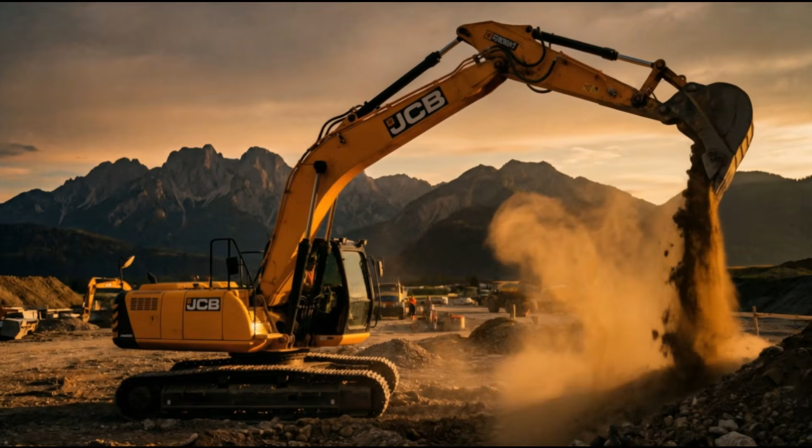You push with the force of one finger, and out comes enough power to flip a car. Sounds impossible? It's not. It's physics. What if I told you there's a simple law discovered over 370 years ago that lets a tiny pump move a 5-ton excavator arm? One law, that's all it takes.

It's called Pascal's law. And once you understand it, you'll see it hiding inside every machine around you, from your car brakes to airplane landing gear. Today, we're going to break it wide open.

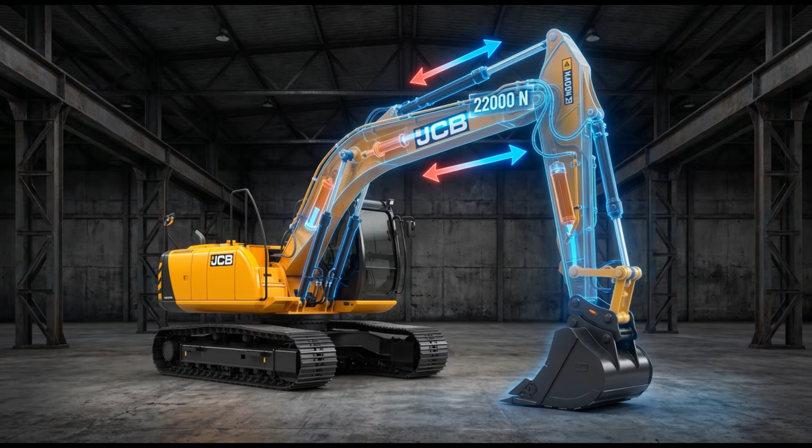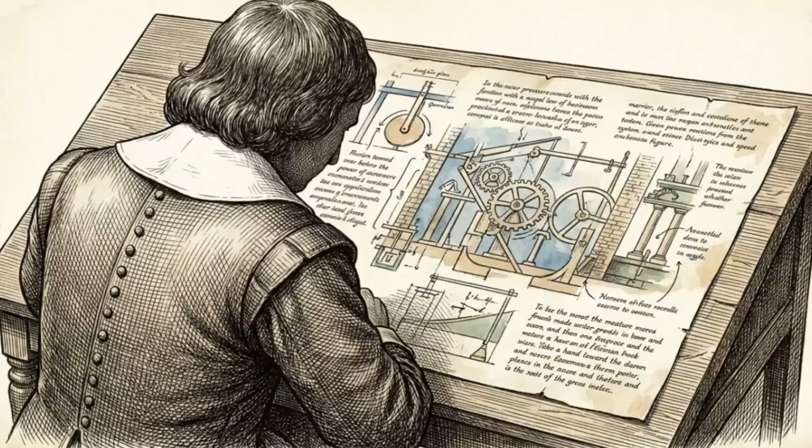Now, before we get into the science, stick around until the end, because I'm going to show you something wild. We'll take a real hydraulic system, a JCB excavator, and calculate exactly how much force its arm produces. Actual numbers, actual areas, actual newtons. You'll be able to do this calculation yourself by the time we're done. But first, let's meet the man who made all of this possible. A French mathematician born in 1623 who changed engineering forever.

Blaise Pascal. This wasn't your average kid. By the age of 12, he was figuring out geometry on his own, drawing shapes on the floor, proving theorems that grown mathematicians struggled with. By 16, he wrote a major paper on conic sections. By 19, he built one of the world's first mechanical calculators, the Pascaline, to help his father with tax calculations. The guy was basically an engineering prodigy.

But the discovery that matters most to us? That came in 1647 and 1648. Pascal started experimenting with fluids and pressure. He filled tubes with mercury. He carried barometers up mountains. And what he found changed our understanding of how liquids behave under pressure, permanently.

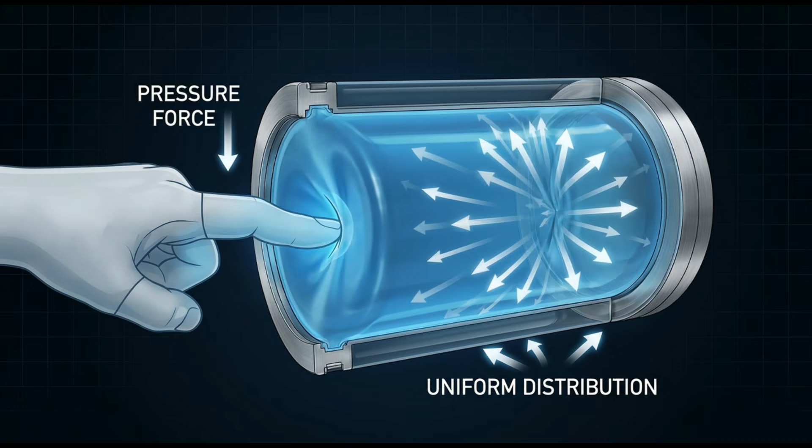So here's what Pascal figured out. And honestly, it's beautifully simple. He said, when you apply pressure to a confined liquid, a liquid trapped in a sealed container, that pressure doesn't just stay where you pushed. It transmits equally in all directions throughout the entire liquid. Every square centimeter of that container feels the exact same pressure.

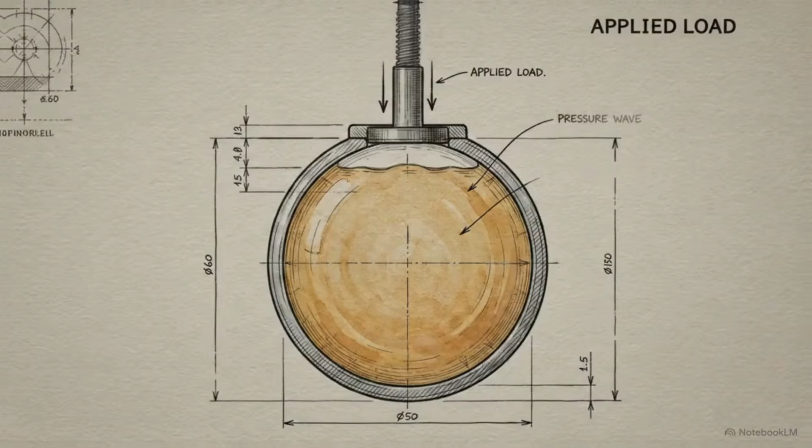Let me say that again, because this is the foundation of everything. You push on one spot, the entire liquid pushes back, everywhere, with the same pressure. Not less, not more, the same. That's Pascal's law. And here's where it gets exciting. Because this one idea is what makes force multiplication possible.

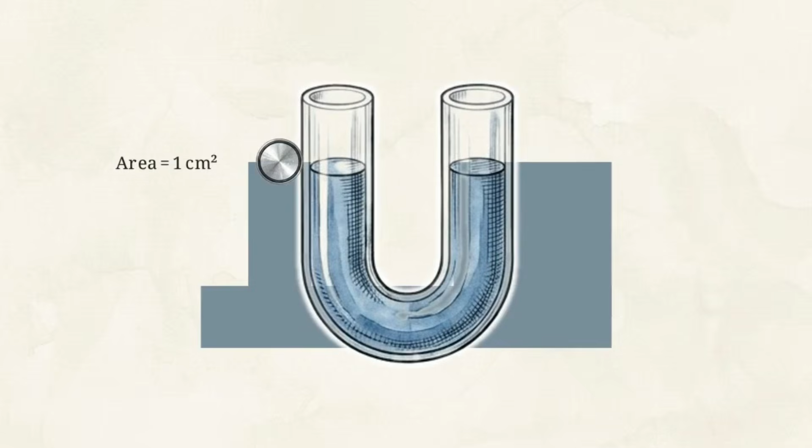Alright, now here's where the magic happens. Imagine you've got a U-shaped tube, sealed, filled with oil. On the left side, there's a small piston. Its area is just 1 square centimeter, tiny. On the right side, a much bigger piston, 100 square centimeters. Now, you press down on the small piston with a force of 10 newtons. That's about the weight of a 1 kilogram bag of sugar sitting on your hand.

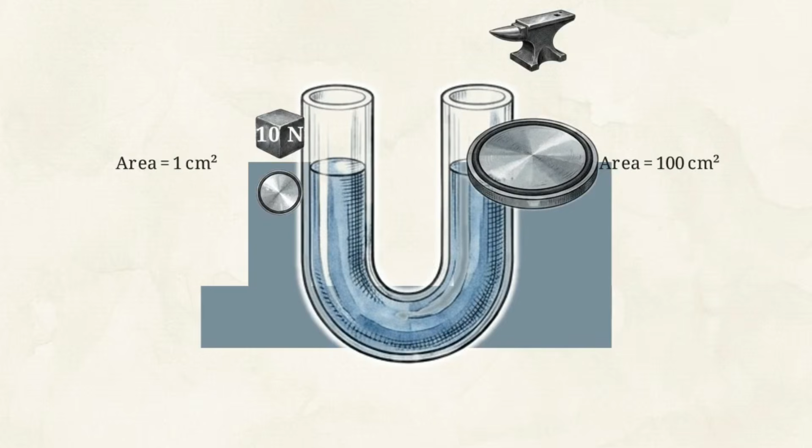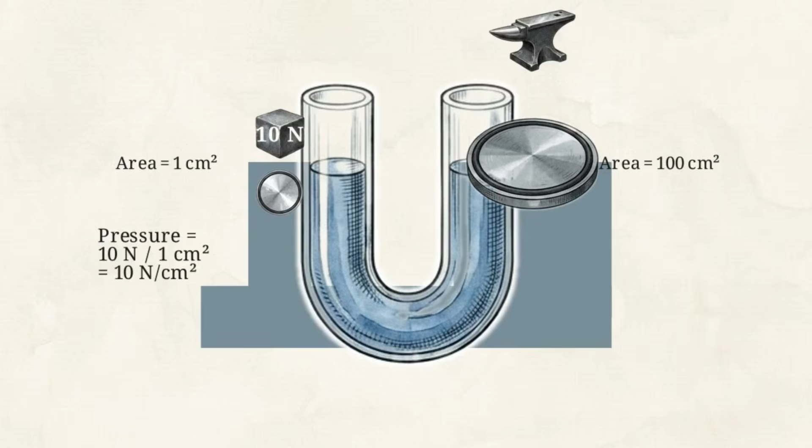Not much, right? But here's what happens. That 10 Newton push creates pressure. Pressure equals force divided by area. So 10 divided by 1 gives us 10 newtons per square centimeter. Now Pascal's law kicks in. That 10 newtons per square centimeter travels through the oil. It reaches the big piston. And because the big piston has 100 square centimeters of area, the force on that side is 10 times 100. That's 1,000 newtons. You pushed 10. You got back 1,000. That's 100 times the force.

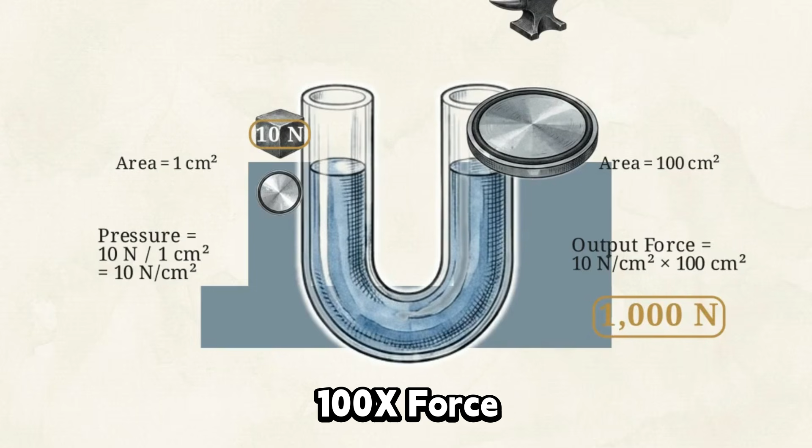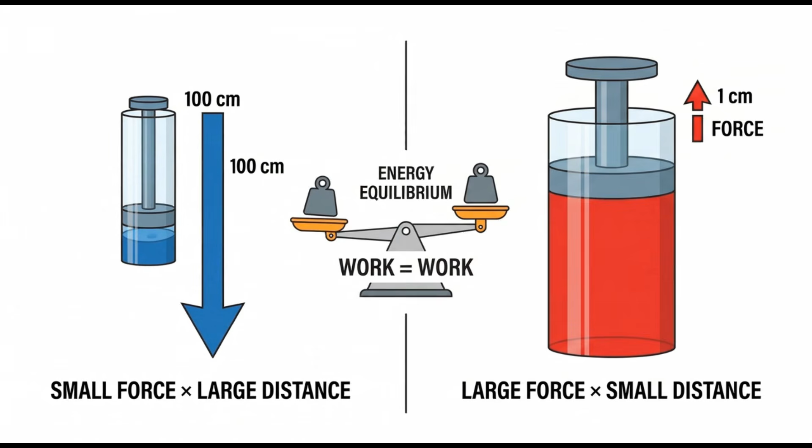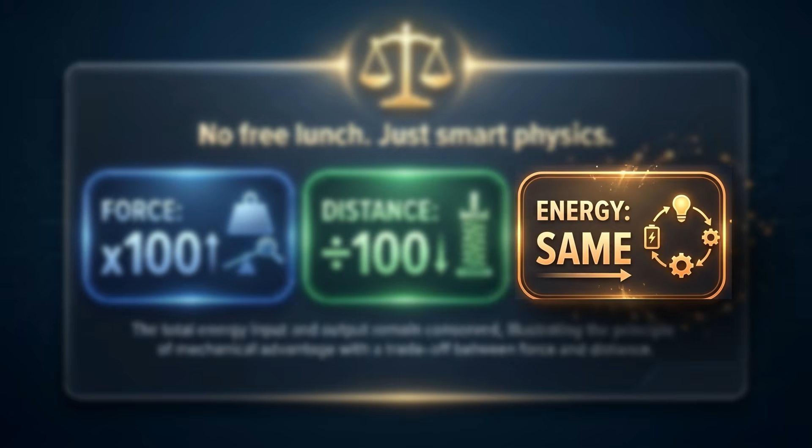From one simple law. Now wait. Before you think you've just discovered free energy, there's a catch. Physics always balances its books. You gained force, but you lost distance. That small piston? It has to move 100 centimeters down just to push the big piston up 1 centimeter. You multiply force by 100, but you divide distance by 100. The energy stays the same. Work in equals work out.

No free lunch. But here's the thing. In most hydraulic machines, you don't need the big piston to move far. You need it to push hard. And that's exactly what this gives you. Let's lock in the math.

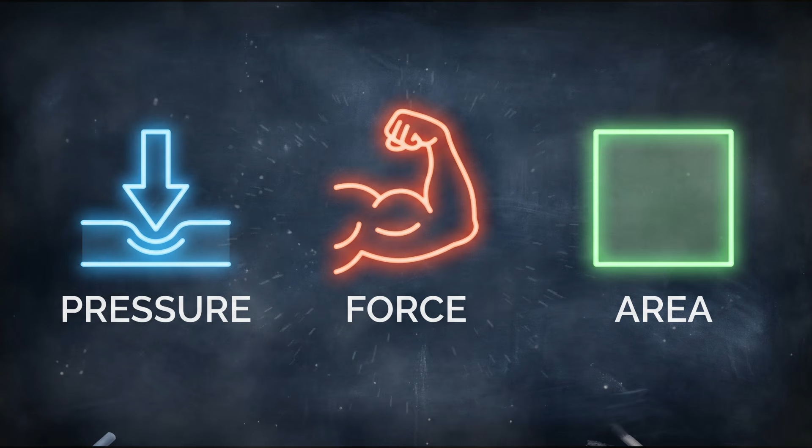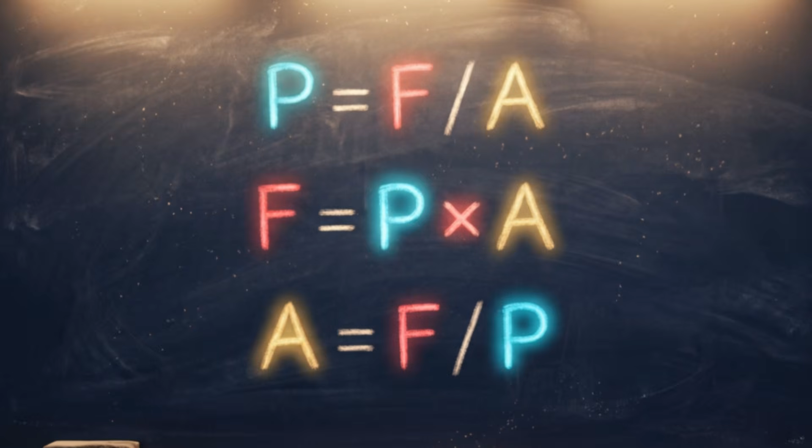Don't worry, it's simple, and you only need 3 things: pressure, force, and area. The core formula is pressure equals force divided by area. P equals F over A. If you know any 2 of these, you can always find the third. Need the force? Multiply pressure times area. F equals P times A. Need the area? Divide force by pressure. A equals F over P. That's it. 3 formulas. They're all the same equation, just rearranged.

Now let me give you a trick to remember this. Picture a triangle. F sits on top. P and A sit on the bottom, side by side. Cover the one you want to find, and whatever's left tells you the formula. Cover F. You see P times A. Cover P. You see F over A. Cover A. You see F over P. Easy. Burn this triangle into your memory.

Let's use this for real. You've got a hydraulic car jack in your garage. The small piston, the one connected to the pump handle you push, has an area of 2 square centimeters. That's about the size of your thumbnail. The big piston, the one that lifts the car, has an area of 200 square centimeters.

Now you pump the handle and push with 50 newtons of force. That's a comfortable one-handed push. Question: what force lifts the car? Let's work it out. Step 1. Find the pressure. P equals F over A. That's 50 divided by 2. Pressure equals 25 newtons per square centimeter.

Step 2. Find the output force. F equals P times A. That's 25 times 200. The answer? 5,000 newtons. That 5,000 newtons is enough to lift about 500 kilograms, half a ton, from one hand on a pump handle. That's Pascal's law doing the heavy lifting. Literally.

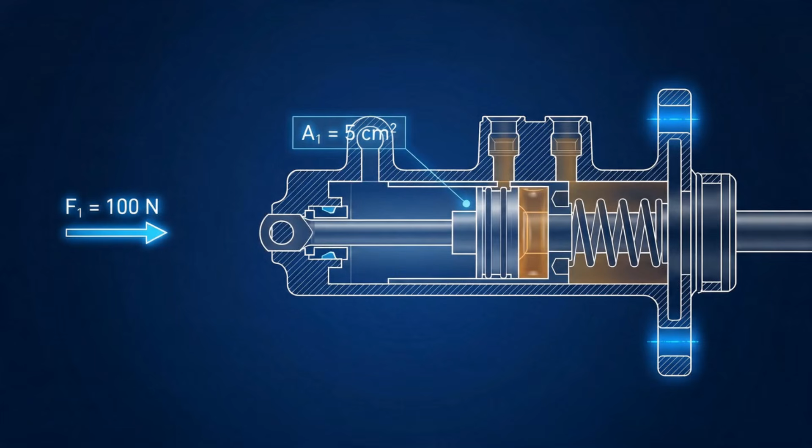Now, hydraulic fluid carries that pressure through brake lines to all 4 wheels. At each wheel, there's a bigger piston inside the brake caliper. Let's say each caliper piston has an area of 50 square centimeters. So what's the force at each wheel? P equals 100 divided by 5. That's 20 newtons per square centimeter. F at each wheel equals 20 times 50. That's 1,000 newtons per wheel.

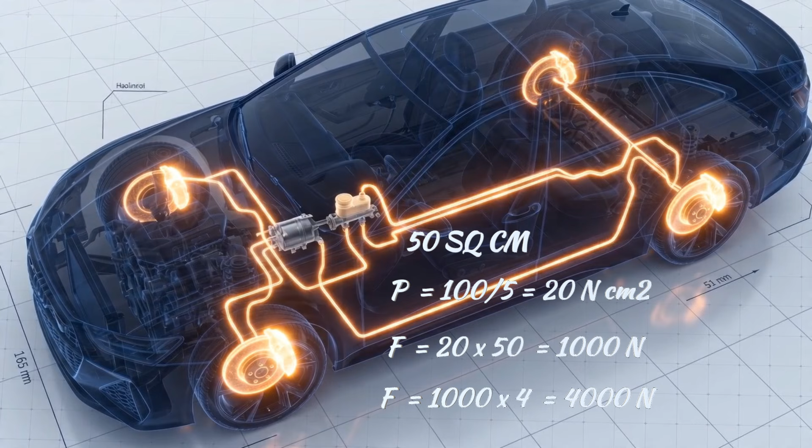4 wheels? 4,000 newtons total braking force from 1 foot press. And that is how you stop 1,500 kilograms of car at 60 miles an hour. Pascal's law, keeping you alive every time you drive.

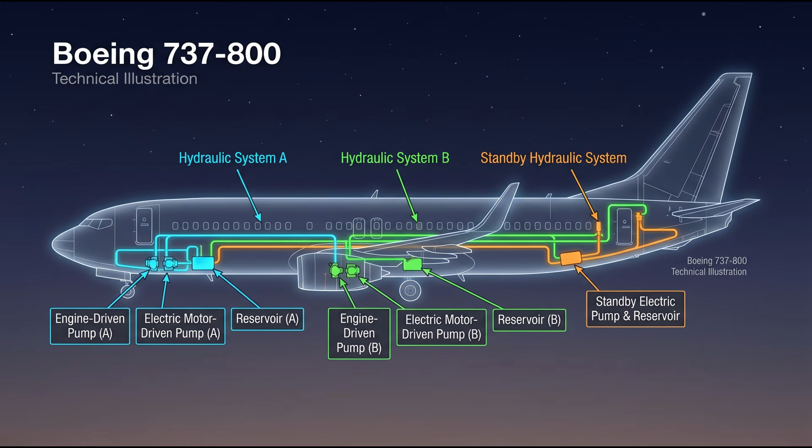Here's something that might surprise you. A Boeing 737, one of the most common planes in the sky, has 3 completely independent hydraulic systems. System A, System B, and a standby system. Why 3? Because if one fails, the other 2 keep working. If 2 fail, the standby still controls the critical flight surfaces. Hydraulic failure on a plane is so dangerous that engineers tripled the safety net. 3 separate pumps, 3 separate fluid reservoirs, 3 separate pipe networks, all running Pascal's law, keeping you safe at 35,000 feet.

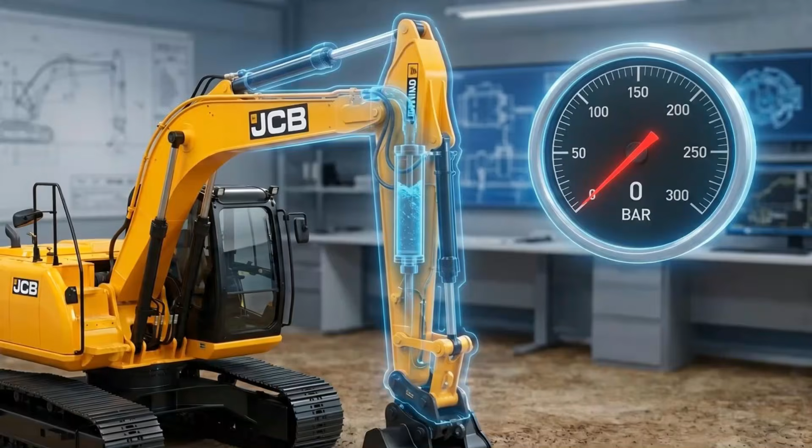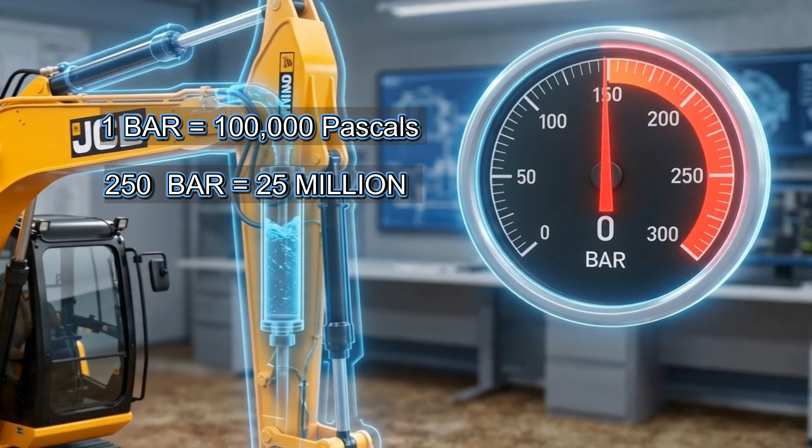Remember at the start, I promised you a real excavator calculation. Here it is. A JCB excavator's hydraulic pump creates a system pressure of about 250 bar. Now, 1 bar is 100,000 pascals. So 250 bar is 25 million pascals. That's 25 million newtons of force per square meter. The hydraulic cylinder on the boom arm has a piston area of about 200 square centimeters. That's 0.02 square meters.

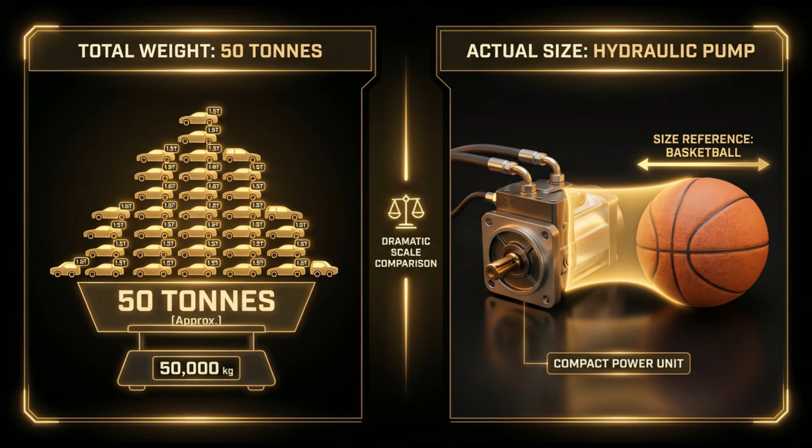So the force on that piston? F equals P times A. 25 million times 0.02. That's 500,000 newtons. 500,000 newtons from one hydraulic cylinder. That's enough to lift roughly 50 tons. And remember, this comes from a pump no bigger than a basketball. Small pump, massive force. Pascal's law at work on a construction site near you.

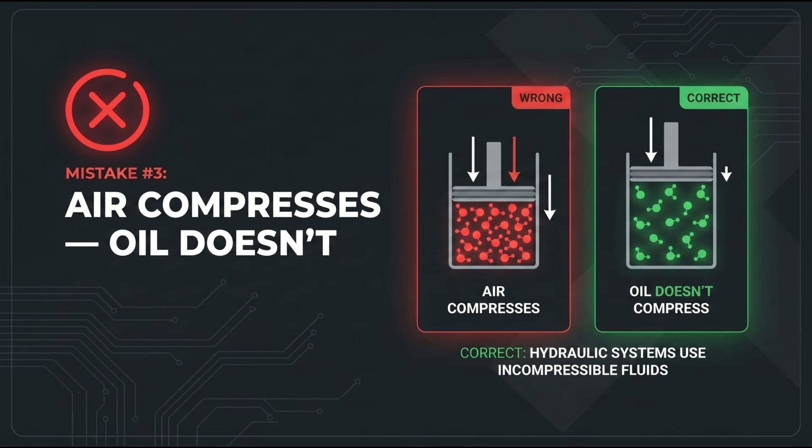Before we wrap up, let me save you from the 3 mistakes every beginner makes. Mistake 1. Forgetting to convert units. If your area is in square centimeters and your pressure is in pascals, which use square meters, your answer will be completely wrong. Always convert first. Mistake 2. Thinking you get more energy. You don't. Force goes up, distance goes down. Energy stays the same. Mistake 3. Assuming Pascal's law works with air. It doesn't. Not the same way. Air compresses. Oil doesn't. That's why hydraulics uses oil.

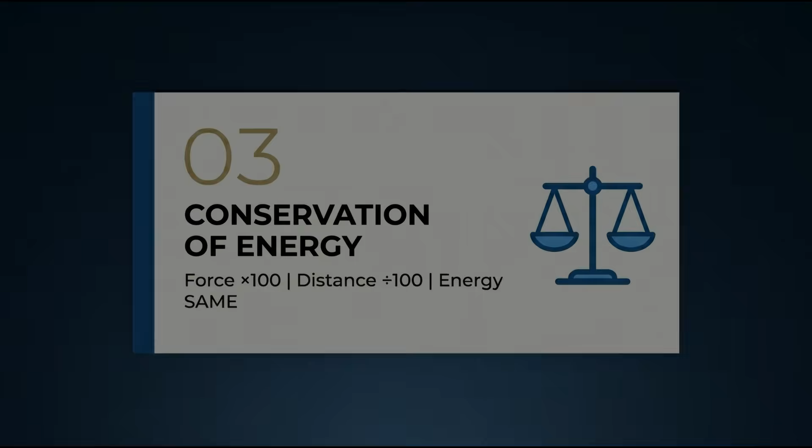Let's lock in what you've learned today. Takeaway 1. Pascal's law says pressure applied to a confined fluid is transmitted equally in all directions. That's the foundation. Takeaway 2. Force multiplication works because a small force on a small area creates pressure. And that same pressure acting on a larger area creates a much bigger force. Takeaway 3. You don't get free energy. Force multiplies. Distance divides. Energy is always conserved. Takeaway 4. The formula triangle, F on top, P and A on the bottom, is your best friend for every hydraulic calculation from here on. Memorize it. Use it. Own it.

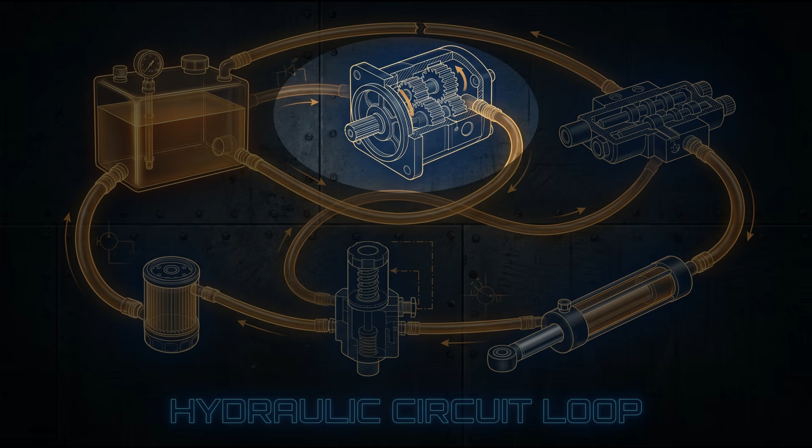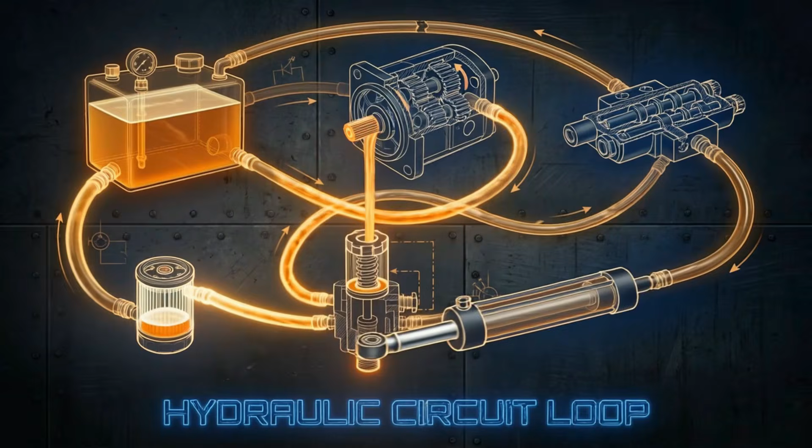In the next episode, episode 3, we're getting inside the machine. We'll break down the 6 core components of every hydraulic system. The reservoir, the pump, the control valve, the actuator, the relief valve, and the filter. You'll see exactly how they connect, how oil flows through the circuit, and what happens when each one fails. If you thought Pascal's law was cool, wait until you see the full system in action.